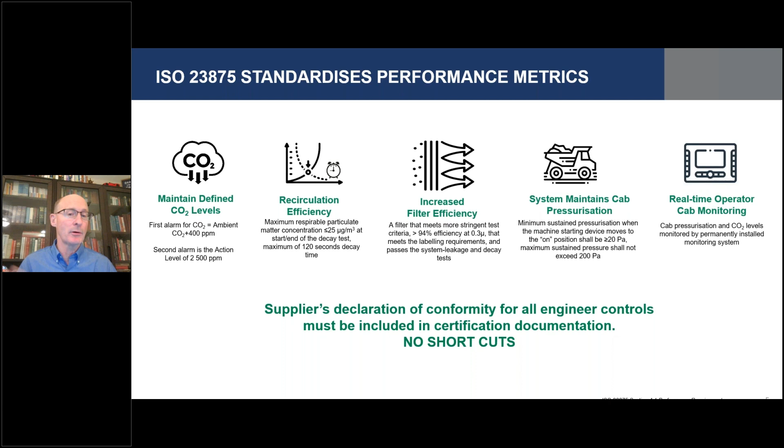And lastly, we're going to monitor all of that, and we're going to make sure that we're bringing in enough intake air into the cab to keep the CO2 levels down and the O2 levels where they need to be. And we're going to monitor the cab pressurization to make sure that we're not allowing particles to come in through the leakages in the cab. Next slide, please.

I think the important thing to recognize is that all of that is great, but if you don't have a way to test the cab to ensure that it's actually doing what we designed in the standard for it to do, then the system is not providing to the operator what it needs to be providing. So in the standard, we've developed four very simple tests that can quickly determine if the cab is performing as it should.

Some of the interesting things about that: we're going to look at CO2 and the way we're going to test for CO2 in the cab, and we're going to look at how long it takes for dust brought into the cab to leave, that is, to be taken out by the filtration system. Just as a point of reference, we're expecting it to go from a level of 2,000 micrograms per cubic meter of concentration down to 25 within 2 minutes, which means this cab is really effective in pulling those particles out of the air.

And then we're going to test the cab pressurization system. That's easy enough to do - you see if it's pressurized and you record the pressure. And then we have another test to look at any leakages which may exist in the low pressure side of the system.

Now, all of that to say that the way the standard was designed, it was designed for everybody to use, not just for the factory to build a machine and do these tests, and that's the last time the testing was done. It's designed for the testing to be an ongoing process, because as the machine is maintained, the air quality system will be taken apart as they disassemble the machine and put it back together again, and it may happen many times during the life of the machine.

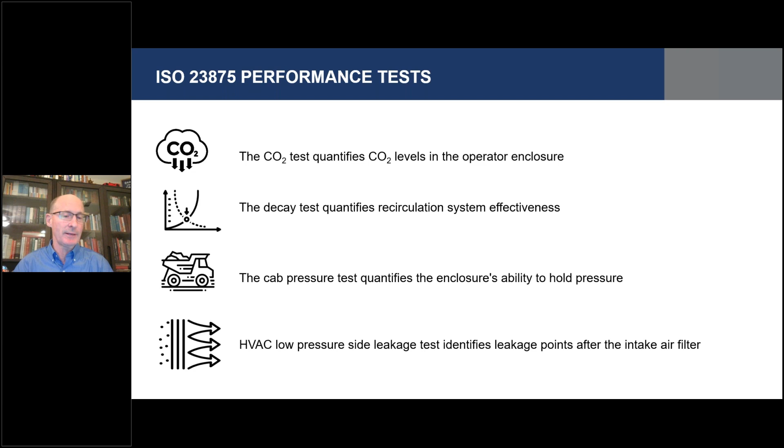So I think the thing that is most important here relative to the standard is that if the standard is working, then that means that we are doing what we were asked to do relative to the creation of the standard. And the way that we know that it's working is adoption - who is benefiting from this and seeing the benefit and then saying, hey, this is something that we need to make a part of what we're doing.

Because the standard facilitates the needs of the OEM, of the retrofitter, of the occupational hygienist, of the reliability engineer, in fact all the way up to the CEO of the company, this standard has become recently adopted. I'm going to give you some examples of the adoption. It has been adopted by Australia. It's now Australian standard / New Zealand standard ISO 23875. So they have made it their own, and this is obviously very useful for their country as they're very aggressively going after air quality issues as it relates to operator enclosures and mining environments.

Similarly, the European Union adopted it. It's European norm ISO 23875. Sweden as a country adopted it. Colombia, South America adopted it as a standard.

And then it is being used as a tool in the regulatory process around air quality, as a path for the regulators to get to good air quality in operator enclosures by providing a standard that articulates how to do these things. The regulator doesn't have to create them from nothing - they can't make them up because they're not engineers, they don't know how to do these things. What they're relying upon is industry, in this case the mining industry, to come up with a standard of its own that gets this done, and then they can step in and say, hey, this is working, you're using it, you're adopting it, we're going to make this part of our regulatory regimen, which means that now everybody can enjoy the benefits of doing it the same way and understanding what that process looks like.

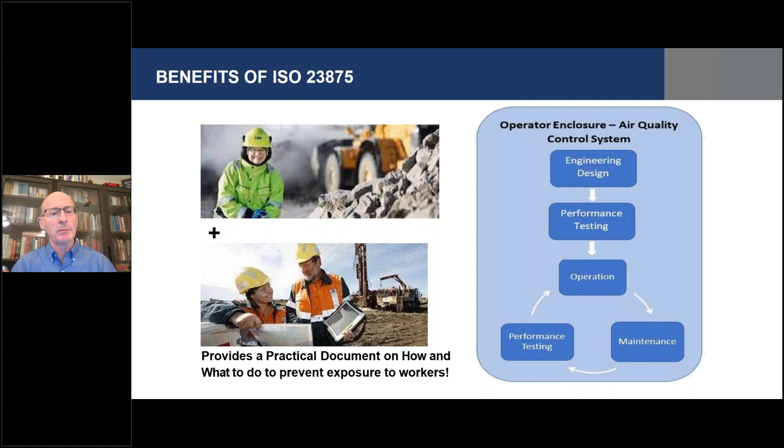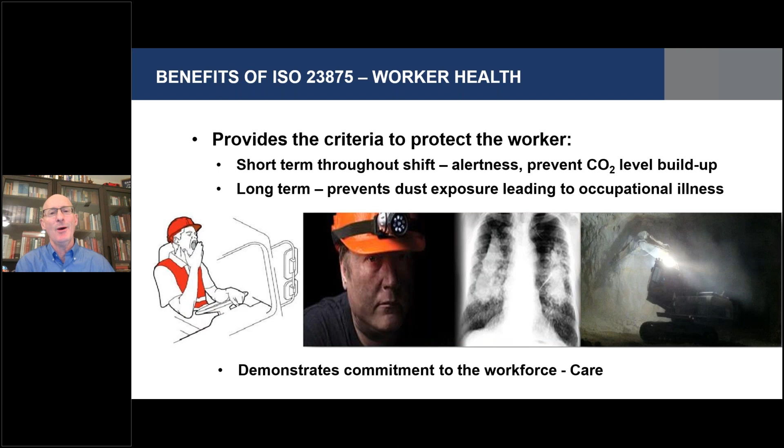We all are aware that worker health continues to be a problem around the world. Silica is not going away. The Earth's crust is 29% silica, so anytime we're digging in it, we are likely getting into silica as an issue. But it's not just silica; it's all the dust that we generate when we are cutting, abrading, and digging in the ground. From the standpoint of understanding what the problem is, public awareness is at an all-time high, and that's true for everybody around the world. There's an acute awareness that what you breathe does have an impact on your health.

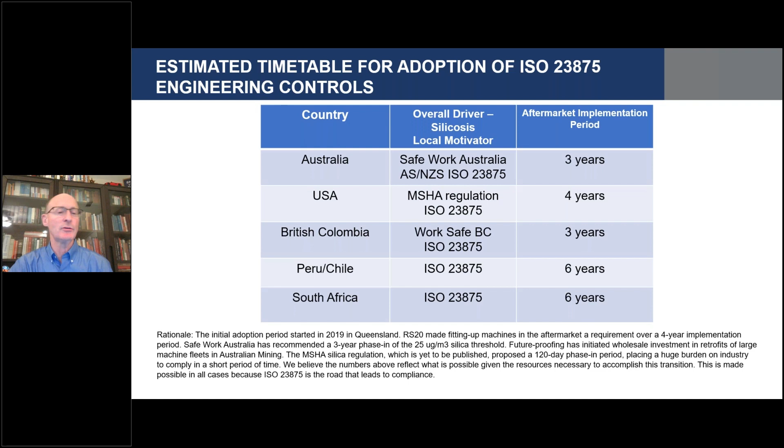The last thing I'd say is that as we look around the world at how this process is happening, we see there's going to be a period of time—this is my opinion—looking at different countries I've cited, for industry to get cabs taken care of. I've speculated on this, but with effort in each of these countries, depending on the level of that effort, we're seeing, between regulatory adoption of the standard as a national standard and industry getting behind air quality solutions, my estimation of how long it's going to be before we see these systems implemented on machines existing in the mining environment in their countries. This gives you an idea of what we're looking at.

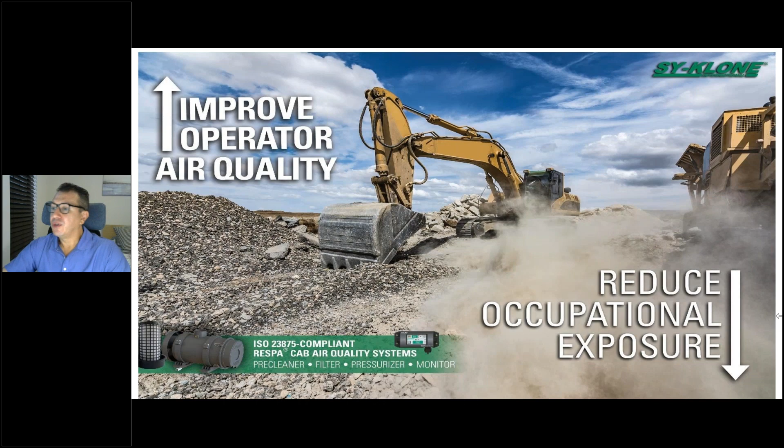Let me just tell you something a little bit before going into the products. You can change the slide to the next one. Here we go. Fantastic. Before going to that, where you have the channel, basically by using our products, you can have a perfect air into your cab. But let me just tell you something before that, because I think this is important.

This is the benefit of having clean air, and I think it's very important to know. Basically, by using our RESPA systems or our Sy-Klone cab systems and filters, you keep your crew safer and more comfortable in the cab, while the machine runs longer. This is one of the important things. I have just 3 points, and then I'm going to jump on the products.

Point number 1 is improve operator health and safety, because you are reducing occupational exposure to respirable dust and debris, which may reduce risk of chronic lower respiratory disease. Number 2, increase operator comfort, because you have a well-running HVAC system, improving the operator environment and supporting employee retention and recruitment. The last point is, you are reducing HVAC maintenance cost, because the evaporator core remains clean. At the end of the day, you are improving machine uptime and productivity, with less service intervals.

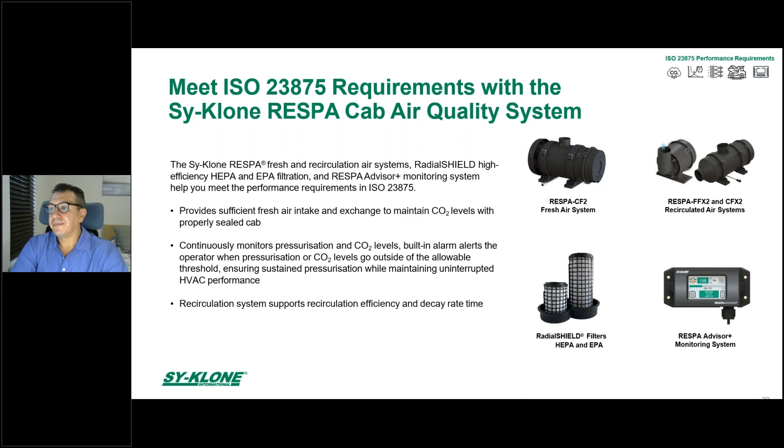Here you go, this is probably one of the main systems. This is the pressurizer, and basically we call it RESPA. We are providing fresh air to the cab by using this. Of course, we have to have a properly sealed cab, 100%. You can change to the next one, please.

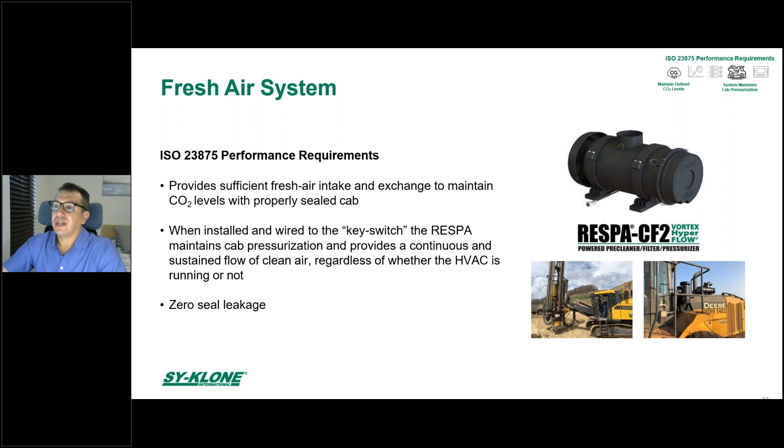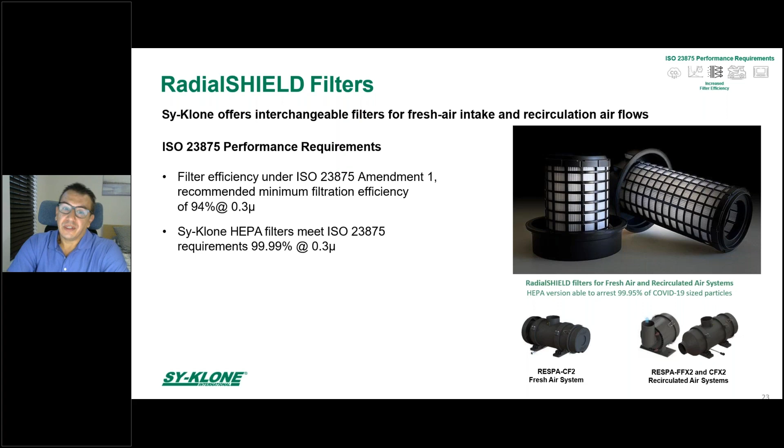Excellent, so here we have our filters that we use in our systems every time. You can see, for example, the efficiency under the ISO 23875 amendment. The minimum efficiency recommended is 94% over 0.3 micron, and the HEPA filters are 99.99% at 0.3 micron. We make our filters in-house, and I think it's interesting that we test every single filter before we ship to our customers. You can change the slide, please.

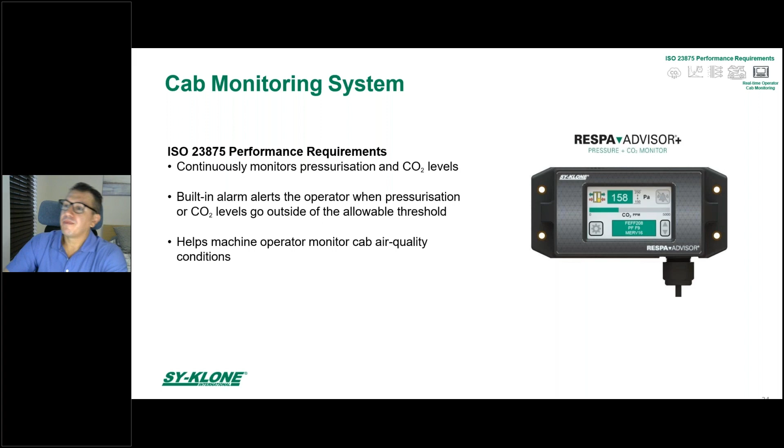Yeah, just here we go. So this is what we mentioned before, part of the ISO. With this device, we are providing a live reading to the operator about the CO2 levels, the pressure in the cab, and also the filter situation. So you're helping the operator to monitor what's going on in the cab and have the right conditions daily. Without any monitor installed, you don't have a way to feel what is happening in the cab. You can change the slide, please.

There we go. At the end of the day, we are happy to show our global partners, customers, distributors, OEMs and users, etc., how they can be providing clean air to the operators. So this is basically the vehicle or the channel to get that benefit.

I can spend a couple of seconds talking about the engines, because this has just been about cab air quality systems, but we also provide, and I think this is important to mention, precleaner systems that help protect the machine's engine, which is one of the expensive parts of the machine. We're protecting the engine, and also providing longer life to the engine's primary and secondary filters, helping the machine run more time with less maintenance intervals by using a precleaner for the engines. It's very similar to the RESPA; one difference is it's mounted close to the engine, but the technology is very similar.

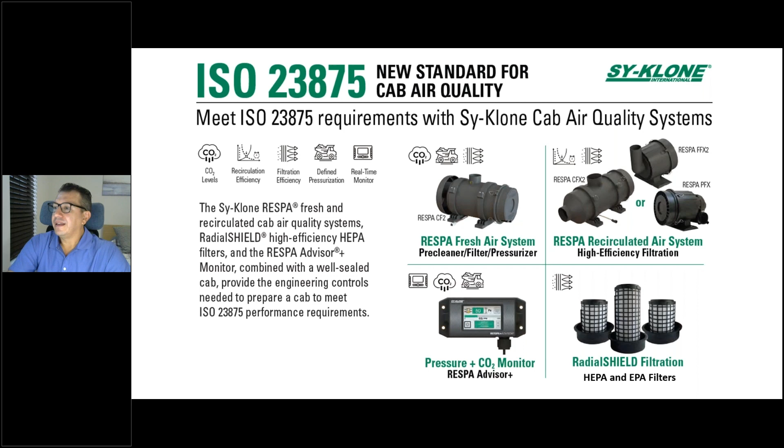I think we can go to the next one, please. Yeah, I think for this case, Jeff wants to share a little bit of this one.

Thank you so much, Luis, for that background. Jeff, Luis is absolutely correct. So I suppose as an extension of your discussion on performance testing, can you take us through a case study into cabin air quality, which focused on delivering clean air at a site that had a fibrous environment?

Right, I think it's important to see graphically what this actually looks like when we talk about air quality. So what you're seeing in front of you are two dust lines. In other words, we were taking the dust concentration levels in two cabs. The cab on top is a factory standard cab.

It does have a pressurizer on it, but it has an inefficient filter. That's a filter that's allowing particles in the range that's problematic for the human being into the cab. And you can see the quantity here.

I think the most important thing to notice is that the dust is going up and down in the cab, and that's because the door is being opened and closed. The cab is a drill cab. You can see the picture on the right. There are 3 drills running on formation.

One of the drills has been retrofitted for 23875 compliance. The other one has not. It's a factory cab, and you can see that how the dust is being treated by the cab is very different from the top to the bottom.

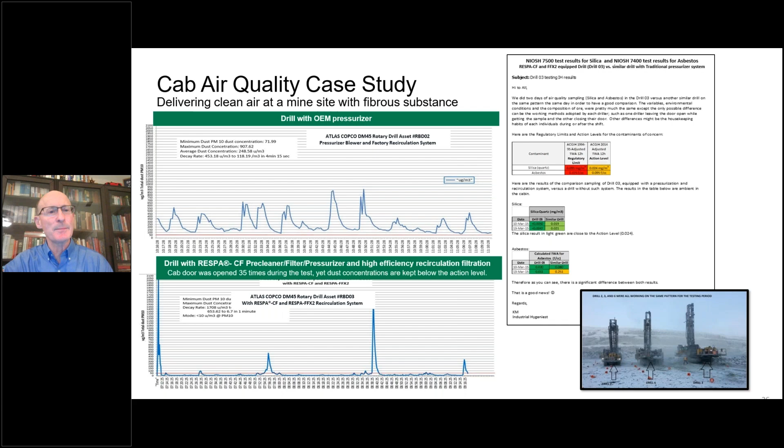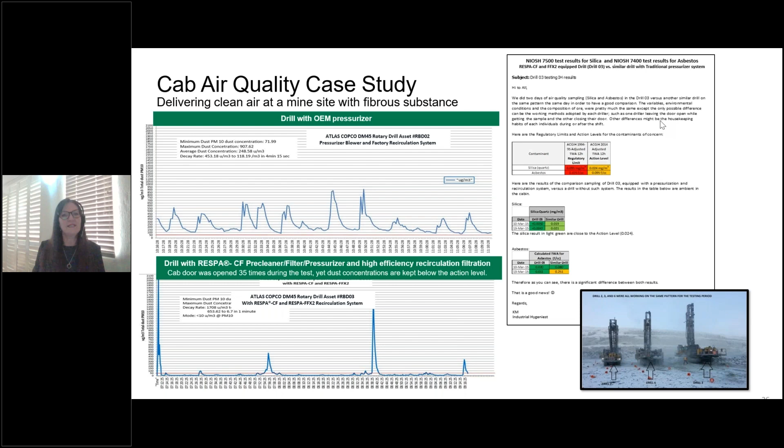Great, thank you Jeff. Given the number of countries that have actually adopted the standard, when do you think South Africa will be adopting it?

Well, I want to talk about that. That's a great question, really good question, and salient for what we're talking about here today. I think 2 things have to happen. There needs to be industry adoption, and it's going to happen before regulatory adoption. Meaning our industries, our mining operations in South Africa, need to adopt the use of the standard and be talking about it as a way of getting to compliance, either with internal policies around dust exposures or around current regulatory pressure or requirements.

This is the kind of thing that doesn't happen instantly at the regulatory level or at the adoption level. It has to be something recognized as valuable by the stakeholders participating in the process of keeping operators safe relative to air quality. So I think there's a 2-step process here.

I'm going to be down in Africa for the next couple of weeks. We're going to be talking to a lot of people, very excited about that. There's a lot of details here that need to be addressed. Ultimately, I believe there will come a day, and it's not in the distant future, when it will be adopted either as a national standard or implemented in some way into the regulatory process.

How long is that going to take? Boy, I wish I knew the answer to that question. I wish I could answer that for every country in the world. The dynamic is different in each country. But I'll tell you there's a huge focus on this, and I think we're going to make good progress. I'm excited to see how it all works out.

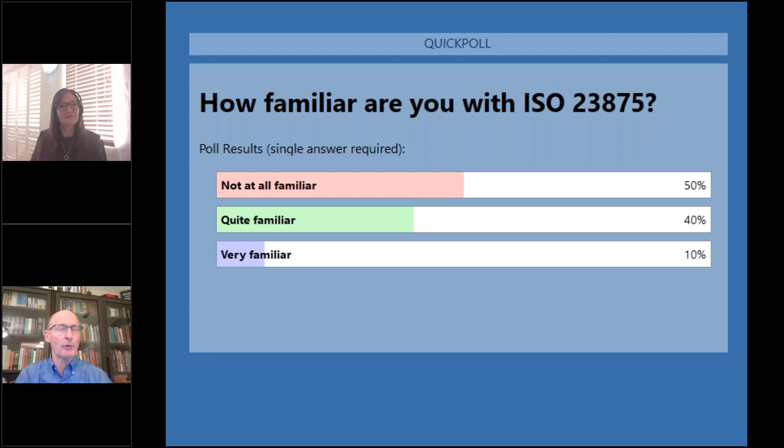Jeff, if you'd like to comment on the results here. Yeah, I would say I'm pretty happy with these results. To say we're 50% not familiar with the standard doesn't surprise me. To say we're 40% quite familiar is really encouraging - that means the word is getting out and the message is being heard. Very familiar, I would interpret as people who have actually read the standard. Quite familiar to me means people that have heard about it a lot, heard discussions around it, have been participating in those discussions.

That's great. Hopefully the 50% of people that said they're not very familiar with the standard at this point have been enlightened to the fact that a standard exists that addresses air quality and solves so many of the issues we have at our mine sites relative to maintenance of our air quality systems, the HVAC, as well as the operational air quality in the operating environment during normal mining operations.

If you've just gotten that out of this, now you know there's a path forward, there's hope. These are problems that can be solved. Respirable illness can be addressed by not exposing our operators in the first place. We can get away from PPE, we can increase operator happiness, we can do a much better job. This is one of the paths, a very clear path relative to this topic. So I'm encouraged by those results.

Okay, thank you. Luis, if I can move on to you now. Are the performance tests able to be performed after initial installation? So when we talk about performance testing, after initial installation, are these tests able to be performed? Sorry, Luis, I think you're on mute. Yeah, sorry again. You mean once we install the products? Yes, so after initial installation, are performance tests able to be performed?

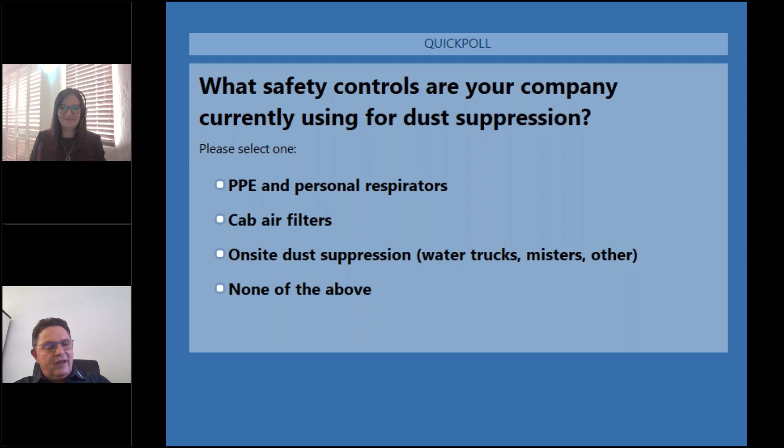All right, okay. Also, I love the question. Thank you. Part of my focus is working in countries outside of Africa.

So first off, I'd say the majority of the mines and clients we have outside of Africa are showing an increasing awareness and concern and seriousness about the air quality in their cabs, and a lot of doing studies, which has really been encouraging. It's been wonderful working with a lot of these companies for more than 2 years before the ISO 23875 was released, on air quality and concerns. So yes, I'd say the awareness is definitely growing and the interest is definitely growing, and we continue to reach out.

Also bearing in mind a lot of your African mining houses are global, so that's also another strategy that has been employed to reach all the sites, is obviously through head office, in collaboration with Jeff and so forth. Thank you. Absolutely. And then there's another question here for Jeff.

What is the biggest decision-making criteria when evaluating cab air quality or filtration? If you'd like me to repeat the question, sorry. What is the biggest decision-making criteria when evaluating cab air quality or filtration?

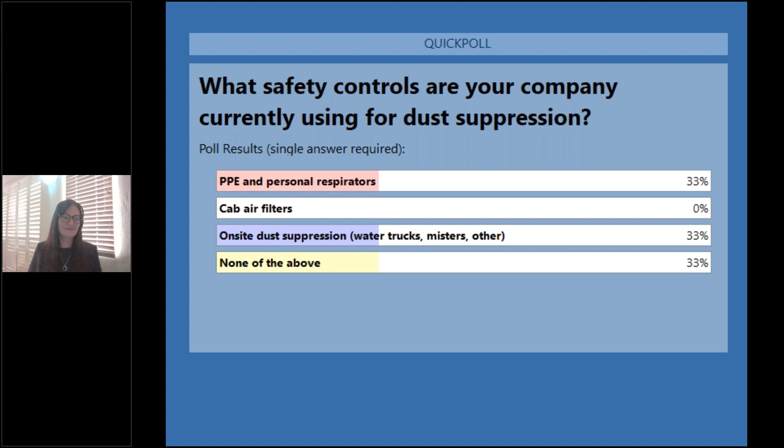Thank you, gentlemen, for those insights into ISO 23875, placing a greater emphasis on the air quality inside the cabin than ever before, thus defining it as a life cycle standard.